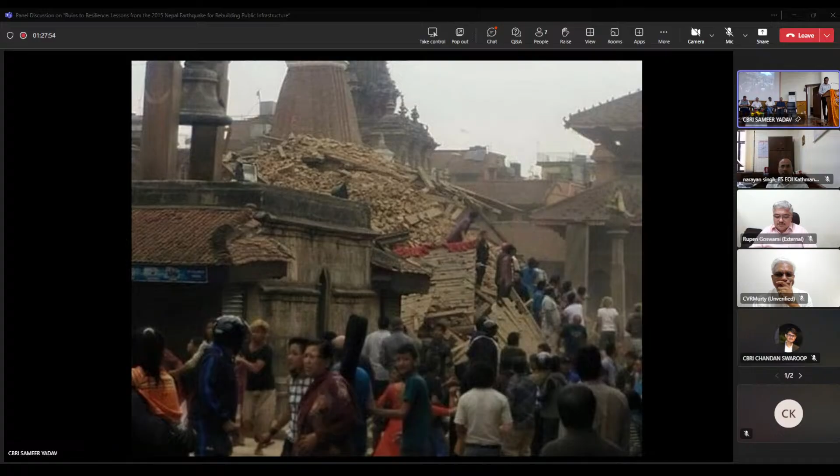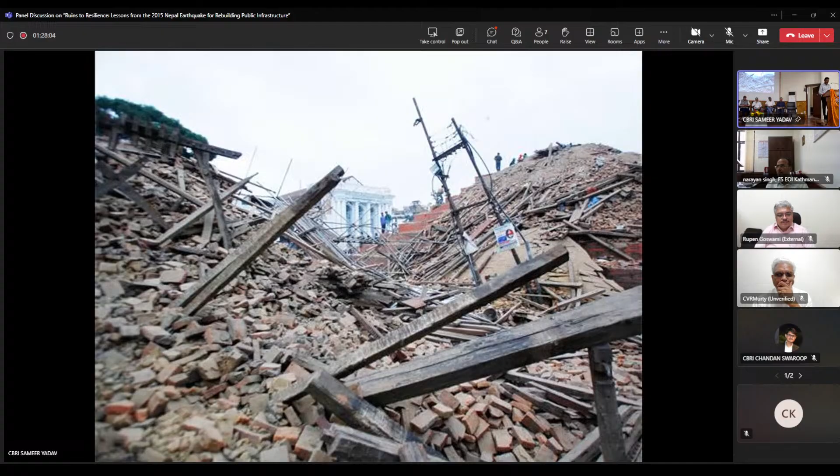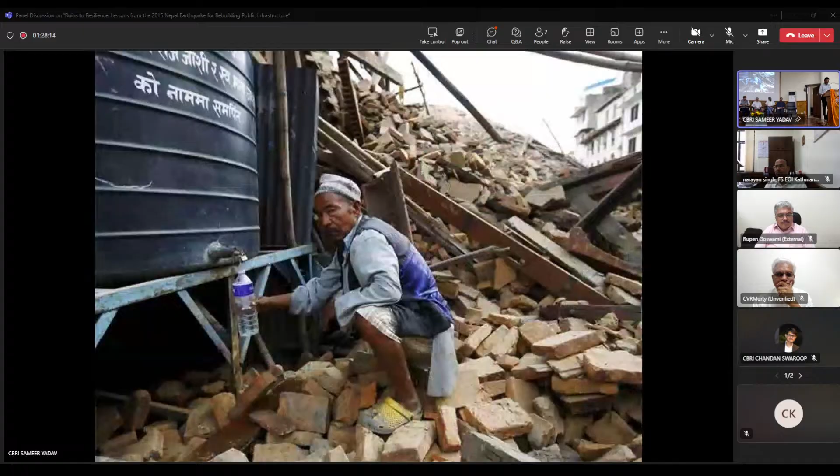This endeavor focused on integrating sustainable construction practices and community-centric construction. Through collaborative planning, design innovation, and on-site implementation, CSIR-CBRI has contributed to the construction of safe, durable, and functionally efficient buildings that now serve as a lifeline for Nepal's post-disaster recovery.

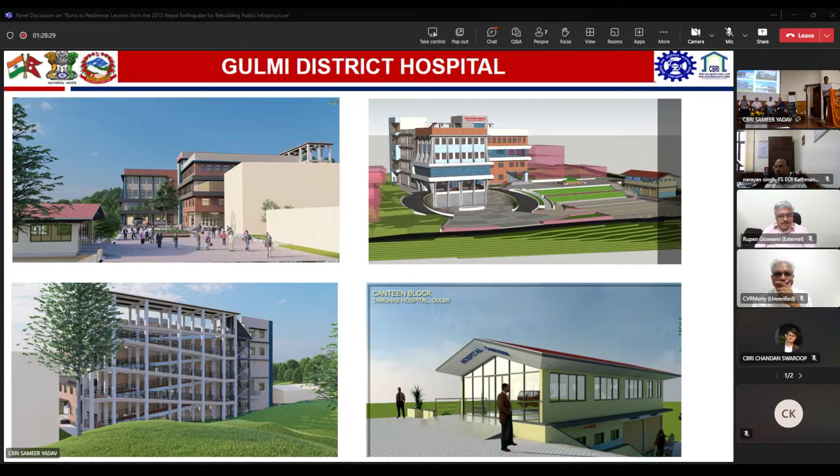That CSIR-CBRI has undertaken planning, designing, and construction of study. But this is... so this particular event has been taken up. Basically, the backdrop has been led by Professor Pradeep Kumar Ji, the CSIR-CBRI. So this particular event was unusual in terms of intensity, duration, and natural periods.

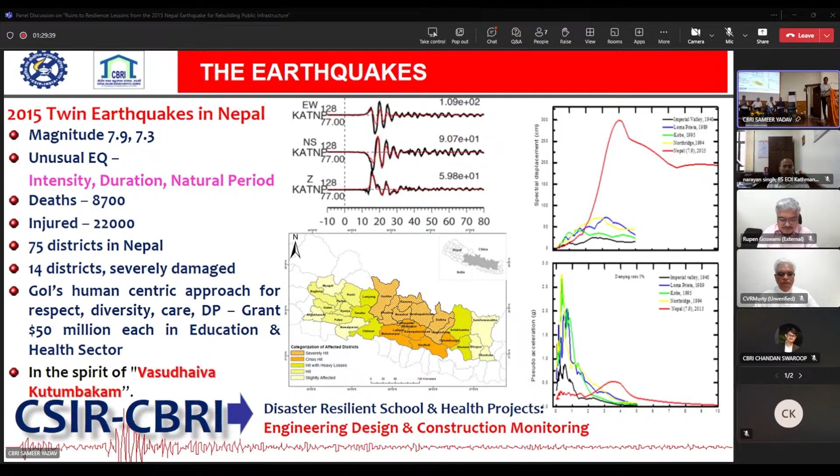Since the task was enormous, that's why the type design model was adopted. And over and above, the monitoring was done online and offline for the construction of different projects. The challenges were numerous. First of all, there was a very time shortage in submission of the DPR. The challenges were in terms of multi-hazard.

So, building the need assessment study by the CSIR-CBRI, here's the challenges of landslide, tides, and excessive rainfall over and above in the remote locations and very difficult terrain. Above all, CBRI has taken, this was a really roller coaster study. So thanks to CSIR-CBRI team for their devotion and enriching experience which has been imparted in this particular project.

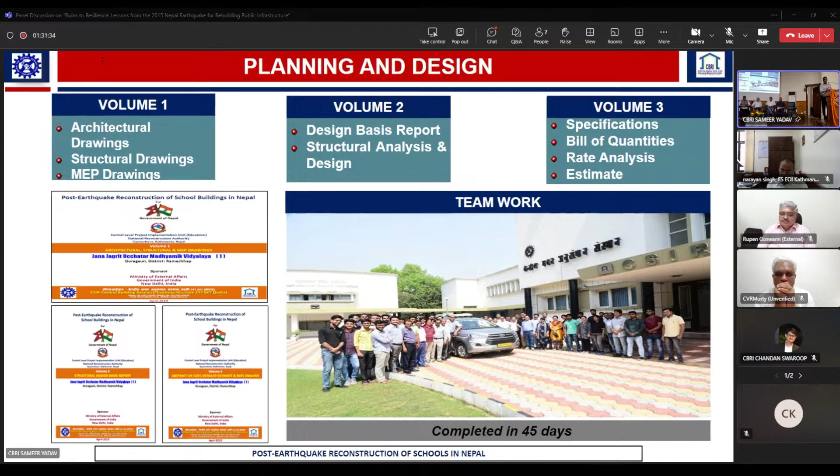And as a result, within 45 days from the start of the project, the DPR has been submitted to the government of India and government of Nepal. And as a result of this particular project, all the papers have been conceived with three important objectives: integrated facilities, use of appropriate technologies, and boundary conditions in compliance in providing efficient functionalities.

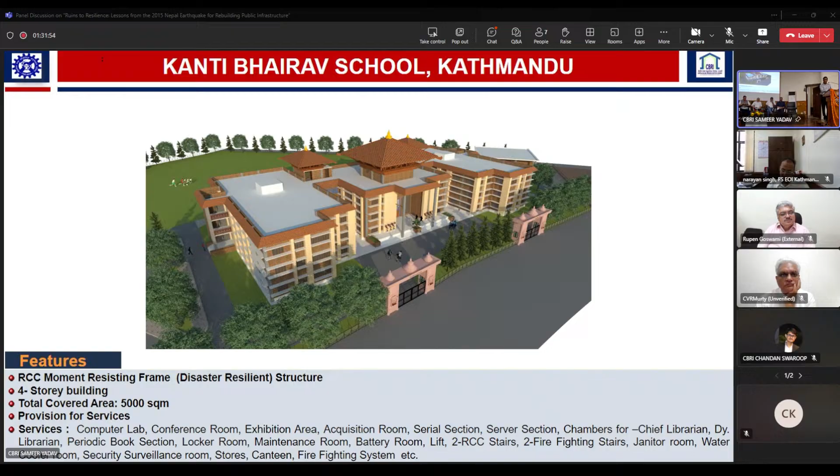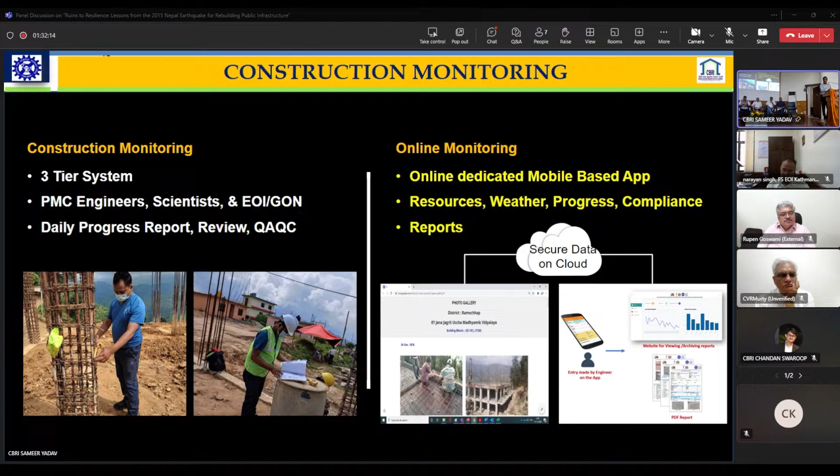So these are some of the pictures that have been visualized of the project. It was put on the ground in reality by CSIR-CBRI and government of Nepal and government of India. So during the execution, a stringent monitoring was carried out, both physically as well as online, through rigorous training, capacity building, and compliance to the mandatory requirements.

And as a result of that, some of the completed education sector projects in different parts of Nepal and health projects in different parts of Nepal are shown here. We have not only constructed the buildings of concrete and steel, we have also provided all the functional requirements, including the infrastructure in all the projects.

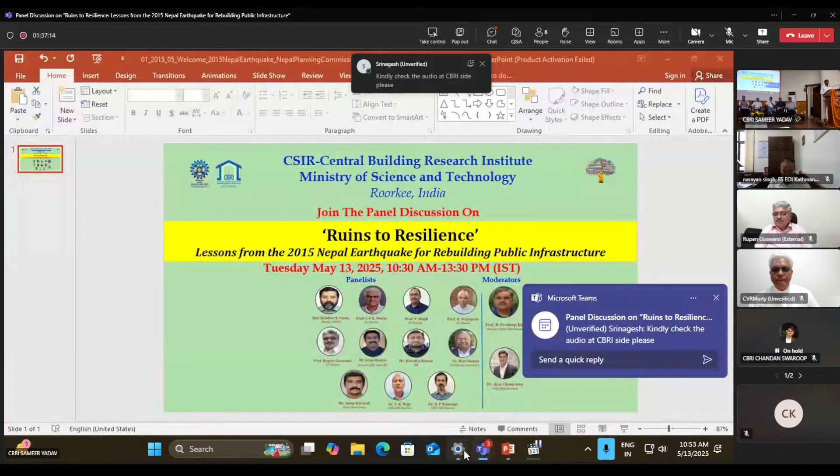Very good morning to all present here. It's my humble duty to introduce the esteemed speakers of the function. Sri Krishna S. Vatsa is presently working as member NDMA. He has been working in the field of disaster management and rehabilitation for the last 25 years. Prior to joining as member NDMA, he worked as policy advisor, disaster recovery, Bureau of Policy, Program Support, UNDP. He has also served as secretary to Government of Maharashtra, Relief and Rehabilitation from 2003 to 2006. He has worked extensively in the area of disaster risk reduction and recovery.

Our second speaker, Professor CVR Murty, sir. Professor CVR Murty is professor at Department of Structural Engineering at Indian Institute of Technology, Madras. His research interest is in the area of nonlinear behavior of steel and concrete buildings and bridges. Professor Murty has undertaken post-earthquake surveys to document valuable lessons after all significant Indian earthquakes in the last 2 decades. He has contributed significantly to the revisions of Indian seismic codes for buildings and bridges.

Our third speaker for the event is Professor D. Sri Nagesh. Professor D. Sri Nagesh is Professor of Practice in the Department of Civil Engineering, IIT Madras, specializing in the field of earthquake hazard. He previously worked at CSIR-NGRI as a chief scientist. His research interests are seismology and geophysics, with a focus on earthquake hazard.

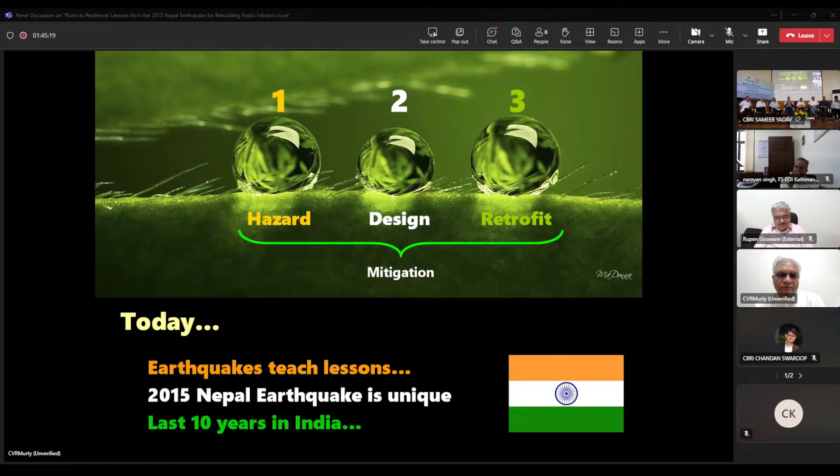And so I would want to share with you the three segments of my presentation today. First is that earthquakes teach lessons, second is that the 2015 Nepal earthquake is unique, and third is what did we do in the last 10 years. So first off, earthquakes teach lessons.

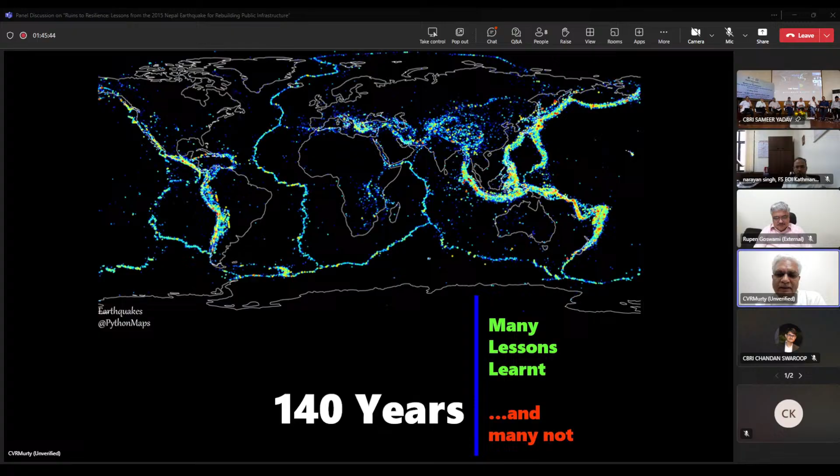In the last 140 years, the subject of earthquake engineering, earthquake safety, earthquake disaster management, earthquake risk reduction has grown significantly, and we have collected many lessons. But what is crucial is that many lessons we have not collected yet. For want of time, I will not dwell into that, but at a later occasion, we will document this and share with the audience. I'll go directly to the second point, which is the 2015 Nepal earthquake.

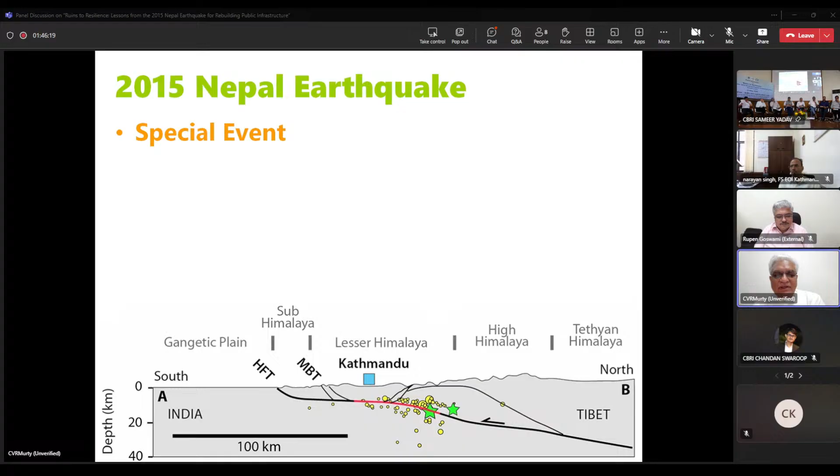We say that it is unique because of a very special feature that it had unearthed for us, which we hadn't experienced before in a major earthquake. So this event took place in the classic interplate boundary between the Eurasia plate and the Indian plate. And a significant segment of that interplate boundary, the subduction segment, gave way. And this is where we are. The 1934 earthquake had slipped a little bit, but what we saw this time was much larger size of slip, extending over about 200 kilometers.

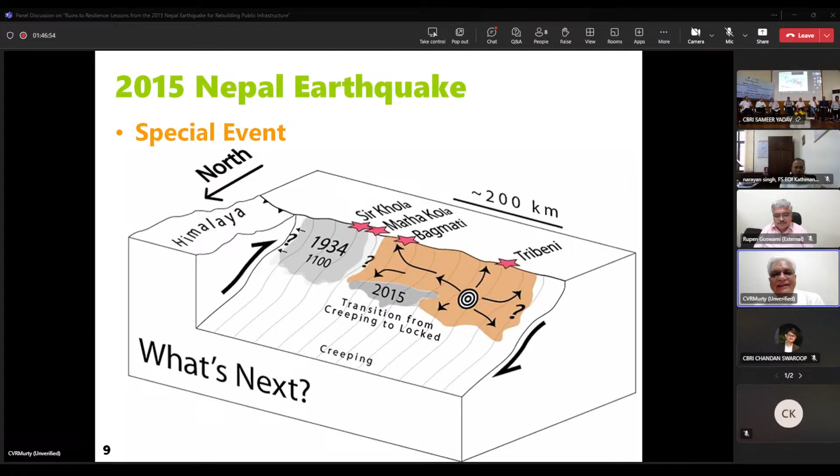Now, this brought out many issues for us. And another concern in this is that we are seeing that the segments are breaking independently. So there are some more segments which have not broken yet. And for them, our worry will be that, for example, if you look at the Indo-Gangetic plains, there are site periods which have been measured after the 2015 Nepal earthquake because of the instrumentation that we had in that region on the Indian side. And we could see very clearly that the site periods are varying from about 2 seconds to 8 seconds.

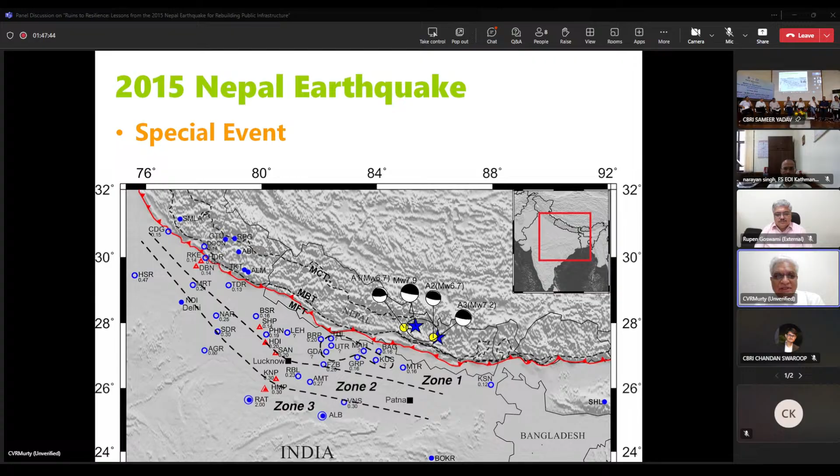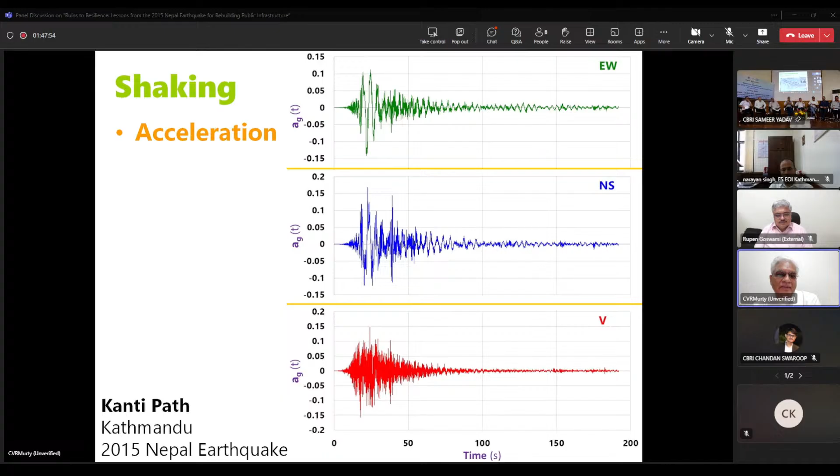So we are looking at structures which have natural periods in this window are likely to get affected during the major event should the event recur in the same or a different segment along the interplate boundary of the India-Eurasia plate junction. Just to take you specifically what we learned, one precise point I want to highlight. When we look at the ground motion in Kathmandu, one important point that got highlighted this time is that there is significant energy provided by the earthquake in the natural period range of 4 to 5 seconds or about 3 to 6 seconds if you want to go a little wider. And this meant that we are going to do a surgical bombing like we saw in the 1985 Mexico City earthquake. That specific structures alone will get affected significantly.

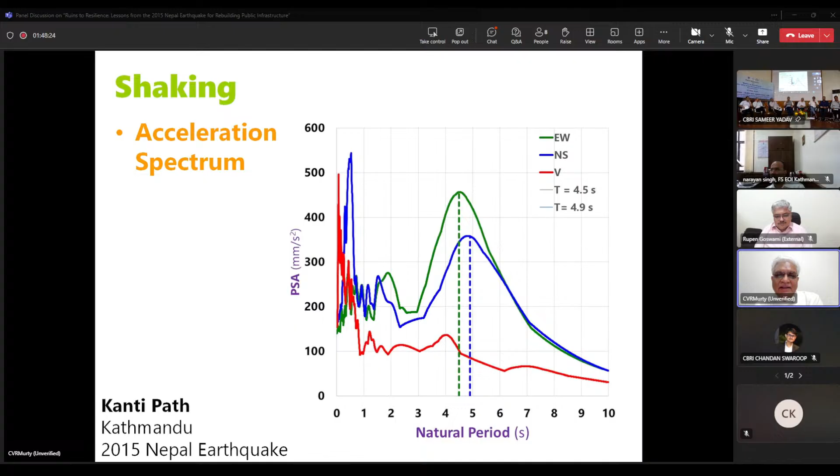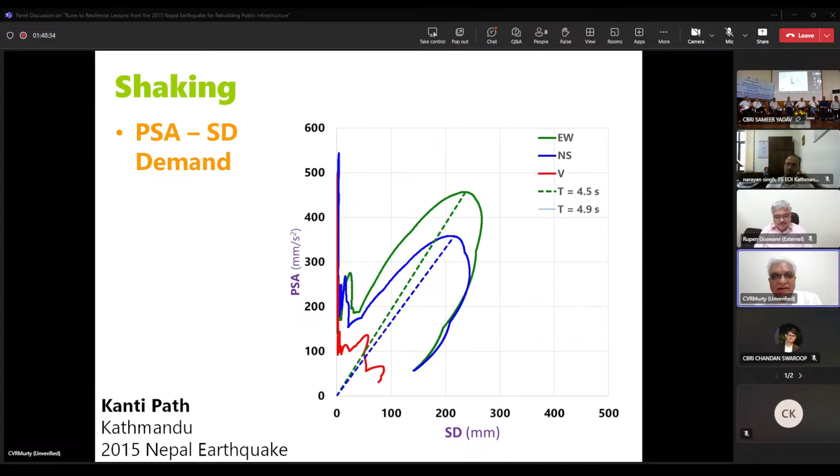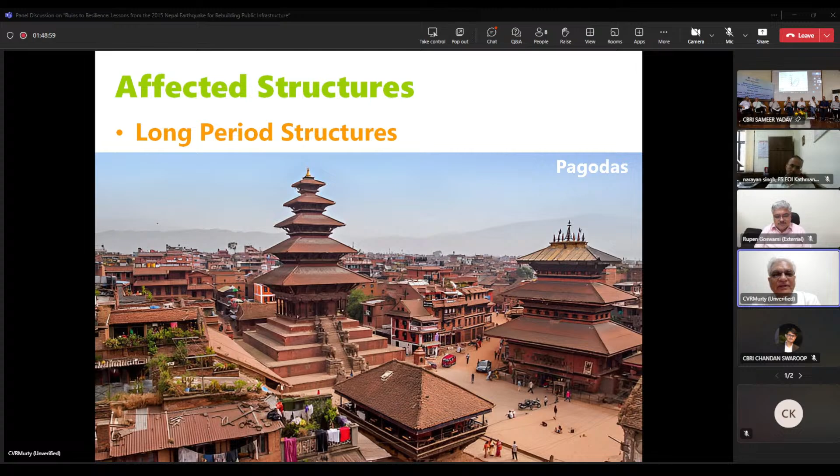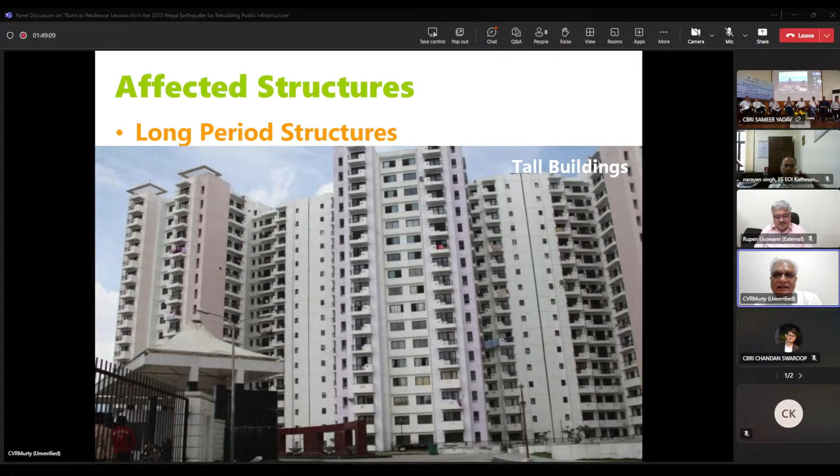I also want to show that there is significant displacement at the base, and if the conditions are unfavorable, you will see large amplification in the response. So this 4 to 5 second pulse that we saw tells us that all long period structures would be affected. So the masonry structures loosely built are also long period structures. Computer programs will give you very stiff answers, but the reality is if they are loosely built, they will have very long periods, and we saw significant damage in them. We also saw significant damage to the only tall building then, and it really led us to thinking as to why that is happening, and it was obvious that very poorly built masonry structures, open ground story structures, all that will get into that window of 4 to 5 seconds or 3 to 6 seconds.

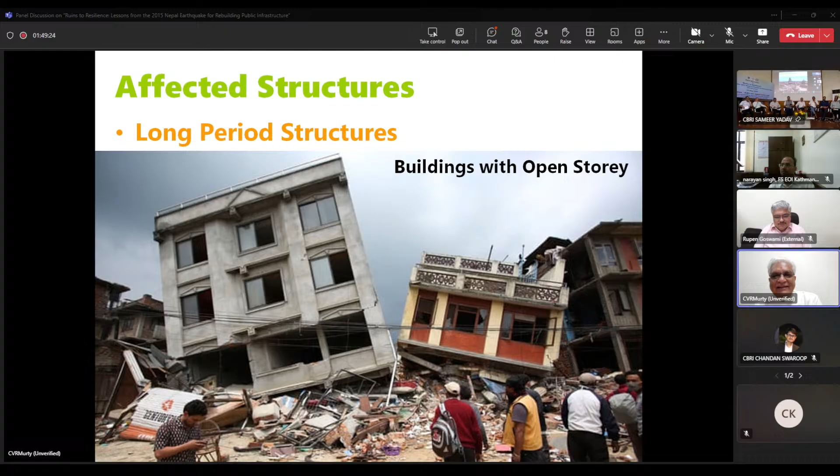And that is the pendulum problem that we will get into. If you're looking at one very classic picture that everyone has been talking about and seeing, it is the loss of the masonry tower, a long period tower. Alongside, we also lost the boundary walls of the royal palace, which are also tall, massive and long period structures. So very clearly, one point that came out of this earthquake was that these long periods are something that we'll have to account for in our design of structures in the road ahead.

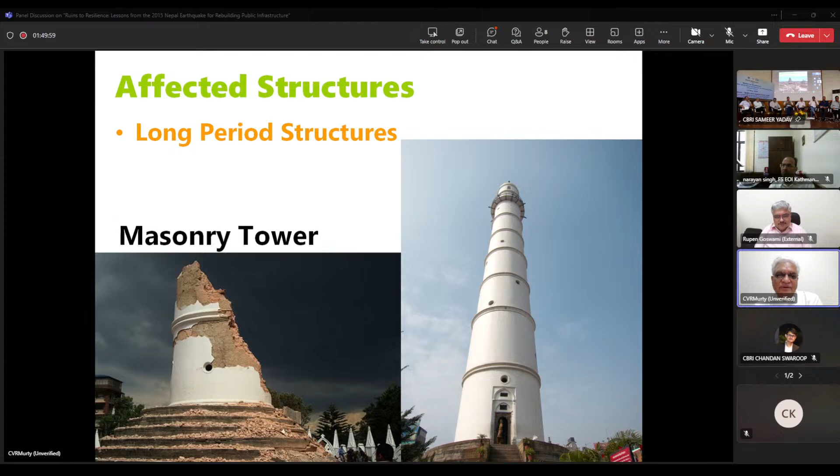One of the interesting things that happened was in the aftermath of the earthquake, Nepal needed to do post-earthquake occupancy decision making, and so they wanted a rapid visual screening. In a jiffy, we had created a form and shared that form with them, but that led us to thinking about what we should do in our country, and so we then reconciled to the fact that we have enough work to do and classified our work into 4 levels of assessment and actionable points for us. And that led us to the first document of post-earthquake safety assessment of buildings that are standing there after the earthquake. Should we occupy it or not?

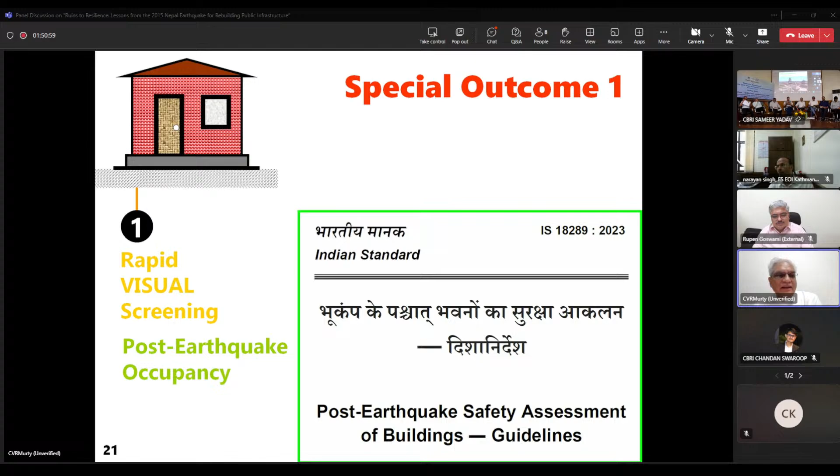And through the Bureau of Indian Standards CED 39, we had created the Indian Standard IS 18289 as a rapid visual screening approach for post-earthquake occupancy decision making. The second one was that we organized all our earthquake safety assessment for pre-earthquake safety assessment. And we put them into 5 levels.

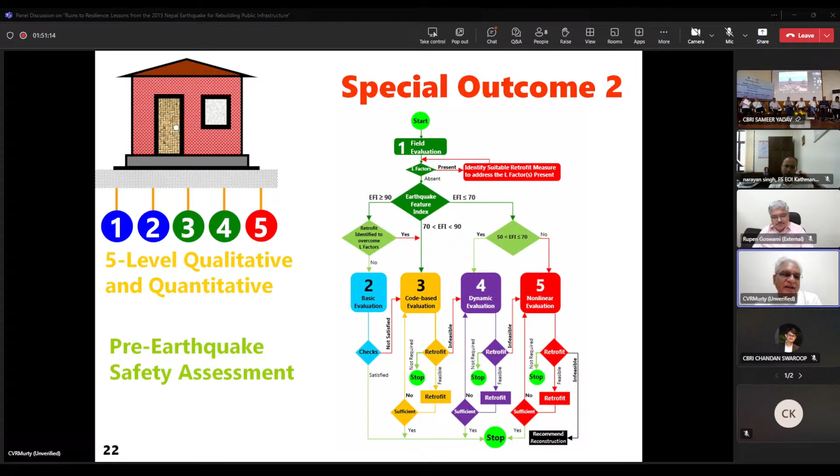And this 5-level telescopic method is brought into the standard, which is poised to get released in a month or 2. Likewise, we also have an important document which is on pipelines, because pipelines are also long period structures because they are sitting on saddles and they are free to oscillate back and forth. And they will also cross faults, which means the large displacements that are there at the faults will have to be accommodated in their design. And so the Bureau of Indian Standards has now created another advanced draft, which is likely to be released in a couple of months on long distance pipelines.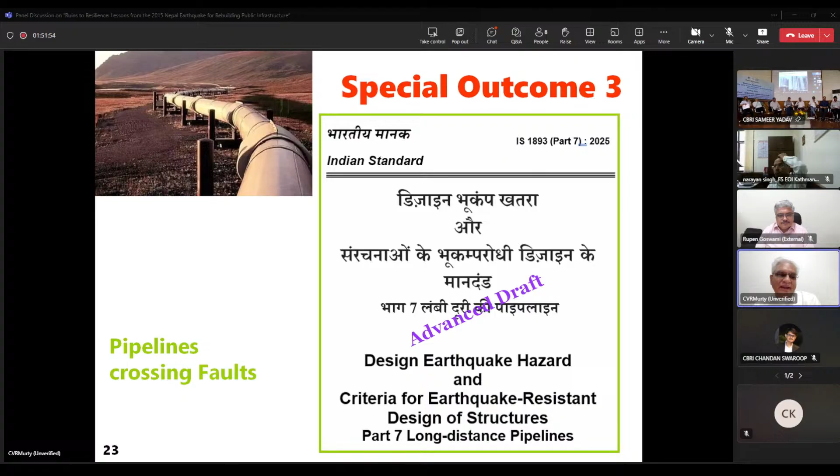So in the last 10 years, what did we do? We had enough pointers we collected from the 2015 Nepal earthquake. We came and created those basic standards that came as an outcome. But let's summarize and see what we did. First item was that towards creating earthquake risk reduction, and in the subject of mitigation, we said we will take serious cognizance of the near fault effects in the Indian standards.

And so in the hazard, design and retrofit codes, we had significantly reflected this pain that we went through in 2015 and the losses of life, because should another segment of the Himalayas break, we will have a similar environment of unreinforced masonry coming down. And so we said, let us now address this formally. And so in the form of near fault ground motions, we have now included this as a first step. In the road ahead, we might even give a spectrum for design of structures.

The second one was in the design itself. We had seen that the long periods are a worry for us, so we would want only stiff structural systems. And so on the list of admissible structural systems, that was included. And of course, on the third side, we had created the whole series of standards for the 5-level telescopic arrangement for assessment of structures. So I would give complete respect to the Bureau of Indian Standards for initiating this effort to bring in the lessons from the Nepal earthquake.

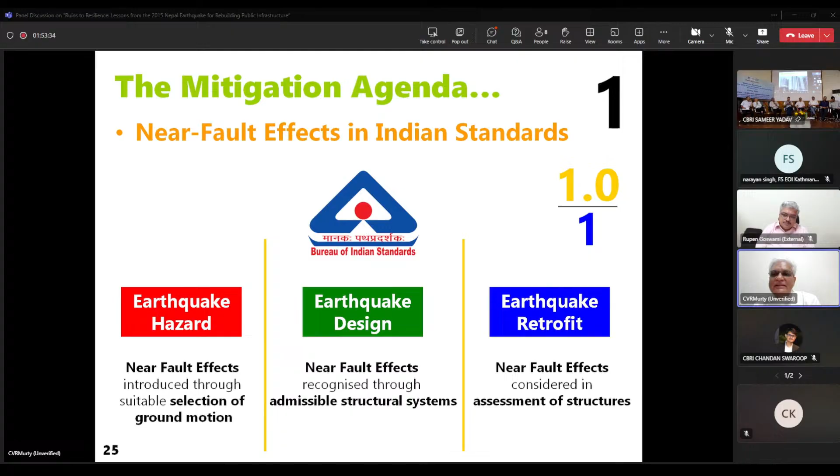Second item is earthquake engineering education at the master's level. NDMA had created the teaching resource material, but training of teachers and augmenting the curriculum is still yet to be addressed. Third is licensing of structural and geotechnical engineers. The Indian Association of Structural Engineers has conducted mock exams and is trying to learn the ropes of how to do this in the road ahead. But legalizing licensing and implementing it are another set of activities that are yet to be taken up. So that was about one of the three agendas that has been addressed.

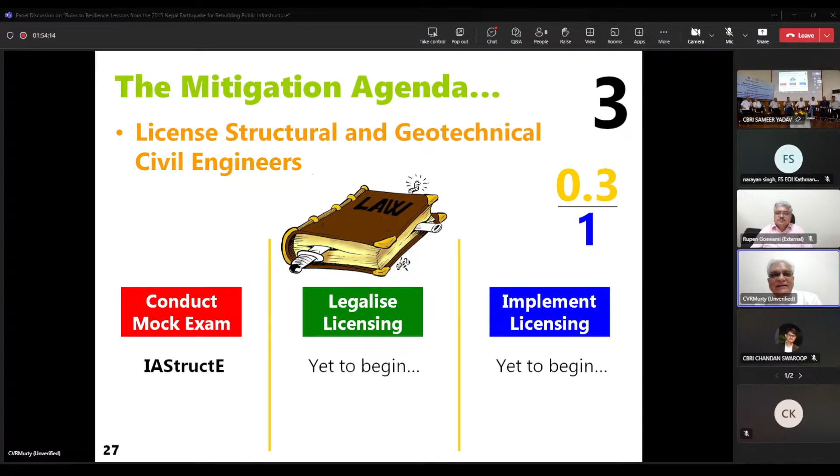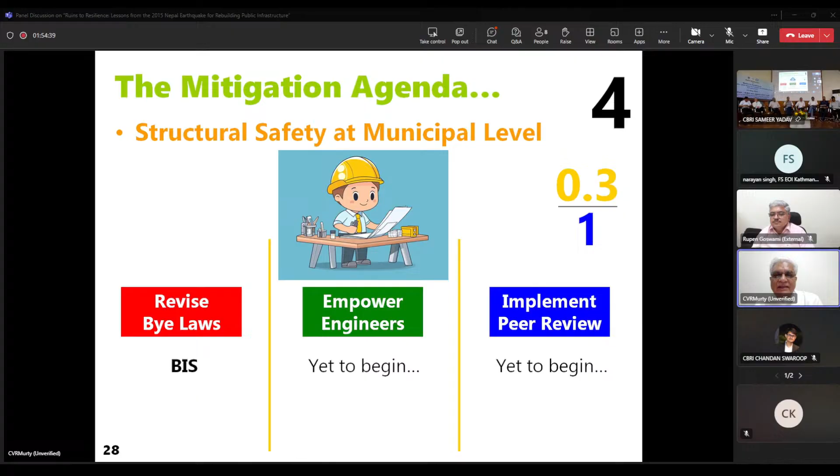Again, structural safety at the municipal level, revising bylaws. Bureau of Indian Standards worked very hard and created the model revised bylaws for all the states, and they gave it to them. Also went and spoke to the engineers at the municipal level and sensitized them on the need to urgently implement the same. But empowering engineers and implementing the peer review at the state and UT levels is yet to be undertaken in a big way. And the fifth item is retrofit of structures.

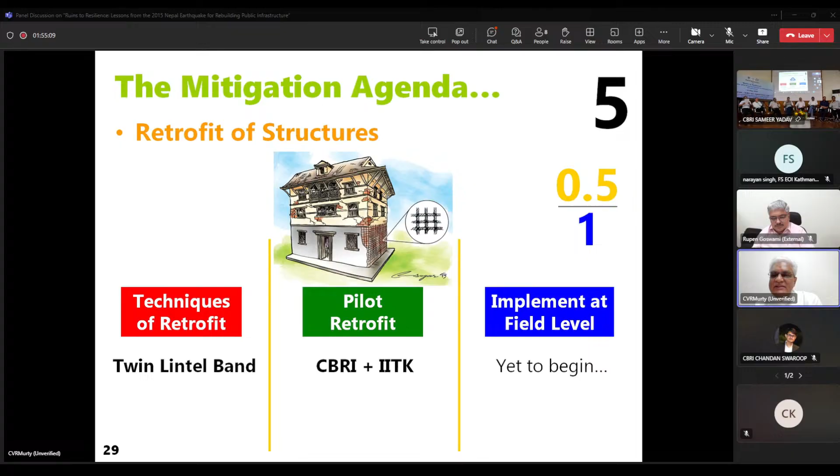CBRI and IIT Kanpur came up with this twin lintel band system. And I'm praying that in the road ahead, the pilots that CBRI has initiated in the northwestern states will really help in demonstrating that this is doable and it is quick and economical. I'm hoping that the states will take this seriously and implement it in a big way in the road ahead. So in summary, what we have seen is that we are halfway down the road towards building systems and processes for mitigation. We have a long walk, but the easy part is done. The difficult part is right at the field level. I pray that we will address that soon.

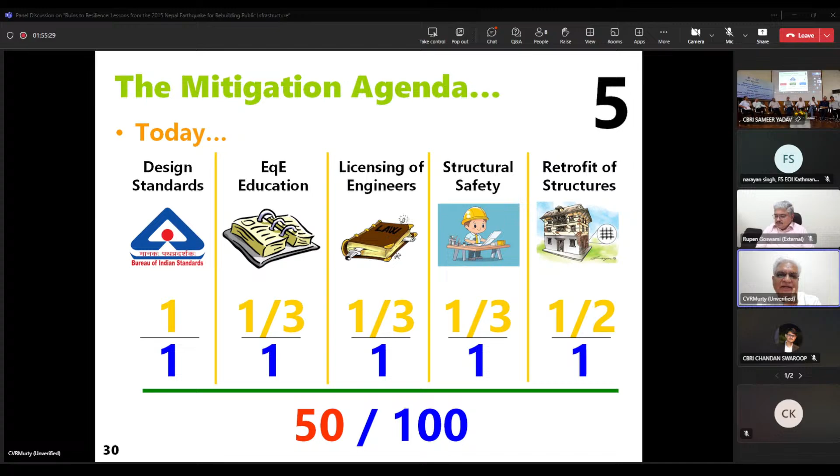So in closure, I'll simply believe that earthquake safety is only at the field level. The books alone will not help. But for the field level to happen, the books and all the backdrop work has to be done, which is capacity building, R&D, risk communication, techno-legal regime, and earthquake safety policy, which are essential to strengthen state governments and UT administrations to take effective action at the field level. And this ecosystem is something that we have to strive to add to.

From our side, each one of us working in different domains should actually do our little bit so that we are not shown a finger saying, what have you done in the road that is behind us. So I'll stop here by saying that we need to do continued hard work because earthquake safety is not one person's agenda.

It is a national agenda, but it's a collective national agenda, which means all our efforts have to harmonically flow one to the other so that we can effectively show that in the next earthquake we have lesser losses of life and property.

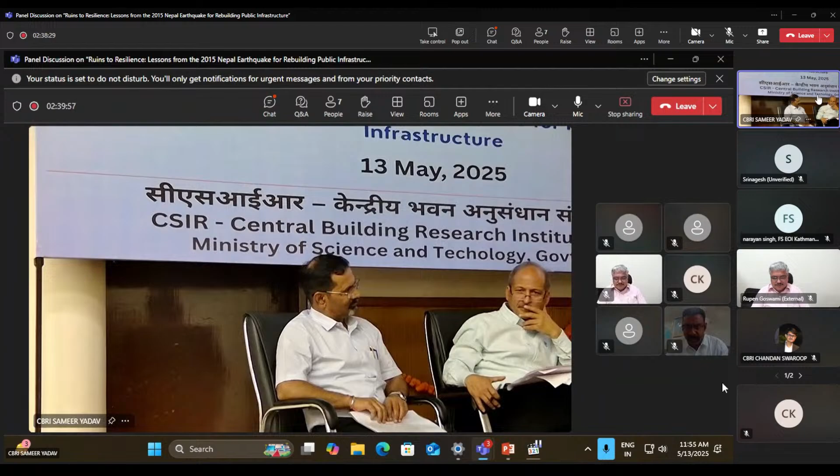Now we'll come to our next panelist, Dr. D.P. Kanungo from CSIR-CBRI. Kanungoji, here is your question: what technological tools, especially early warning, drones, or GIS, proved most valuable during and in the aftermath of the earthquakes, and how can they be better utilized going forward?

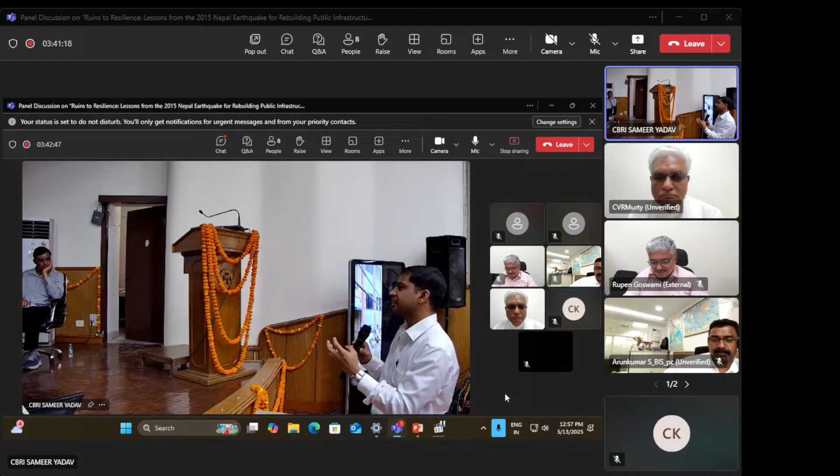Sir, after hearing the panel discussion, only one question I have. What I have observed, and I think our academicians in the panel will agree, the overall knowledge of earthquake engineering per se, structural dynamics at graduation level, is very poor in our country, other than the premier institutes. So what are the steps that we can take to inculcate the basic necessity and the urge among BTech graduates or engineers to consider this as one of inherent and basic importance among undergrads and young budding civil engineers?

Yeah, thank you, Mickey. I request Murthy sir to answer this. This is a bomb. So, sir, see, first education is, sir. Yeah, I know. I'm saying the answer is a bomb. So the worry is the undergraduate curriculum is coming down in its content as far as engineering is concerned. We have 7 courses out of 45 right now in civil engineering, which means that you can't achieve much in undergraduate. I pray that the other colleges don't take this route that IIT is taking, and they will stay clean and have at least 50-60% or 70% of content in civil engineering.

First. Second point is that it is not happening when faculty members appeal to the higher officers, it is not happening. Bottom up is getting suppressed because these earthquakes are happening occasionally. What I think we require is some wisdom at the higher levels to ask at least a few colleges to produce graduates who are formally trained in this subject.

I'm looking for a day when an engineer in India says earthquake is displacement and not a force, and that has not happened yet. And for this, I would request Director Pradeep Kumarji to use his good offices and get some directive top down, because it is not happening in the last 33 years, at least in my existence in the academia, that anybody is listening to us in terms of implementing a long-term program.